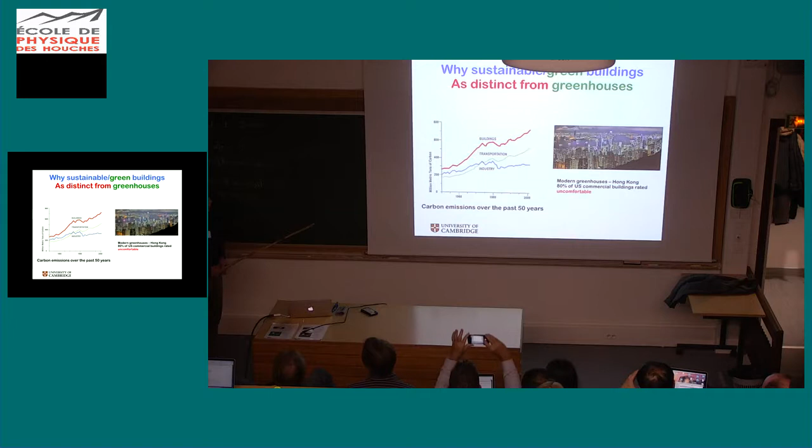If you do a survey of people who work in commercial buildings of this type that are fully air-conditioned, you find that most of them think they're horrible. Everybody knows that in a US building in the winter you have to take your clothes off because they're too hot, and in the summer you have to put clothes on because they're too cold. So we don't even get the sign right.

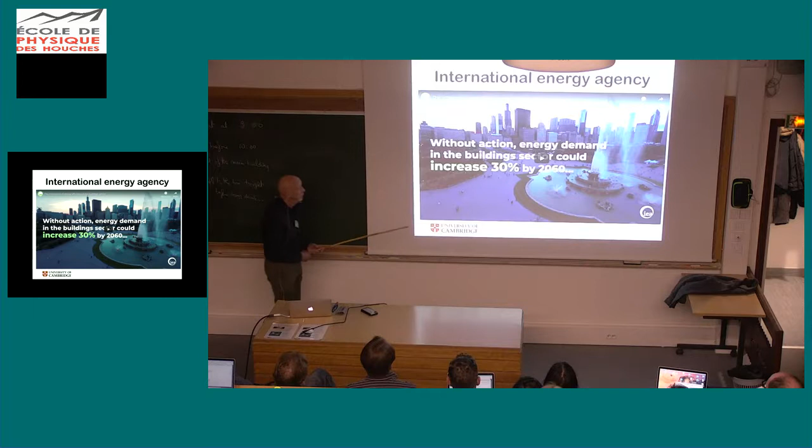There's a real concern that this is actually just going to get worse. Here's a recent report from the International Energy Agency saying that energy demand in buildings could increase by 30% by 2060. In their report on the future of cooling, I've taken a few phrases here from their executive report, which you can read, but I think it's very clear that something needs to be done.

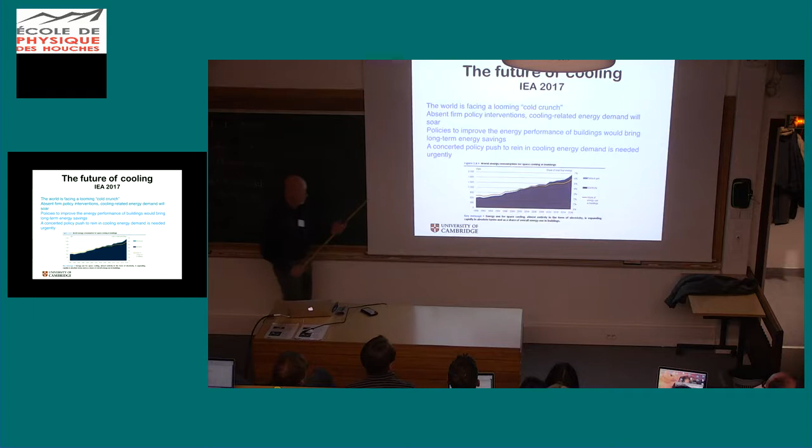If you look at the energy consumption in space cooling for buildings, you can see it rises inexorably and is going to continue to do so. So it's a serious problem, a serious contributor to greenhouse gas emissions and so on. So what can you do about that?

And here are the culprits, the air conditioning units. I lived in San Diego for 12 years, and the weather there is absolutely perfect. My neighbor installed one of these on the side of his house and blew all the hot air out of his house directly into my living room. So it meant I had to close the windows in my living room because of that.

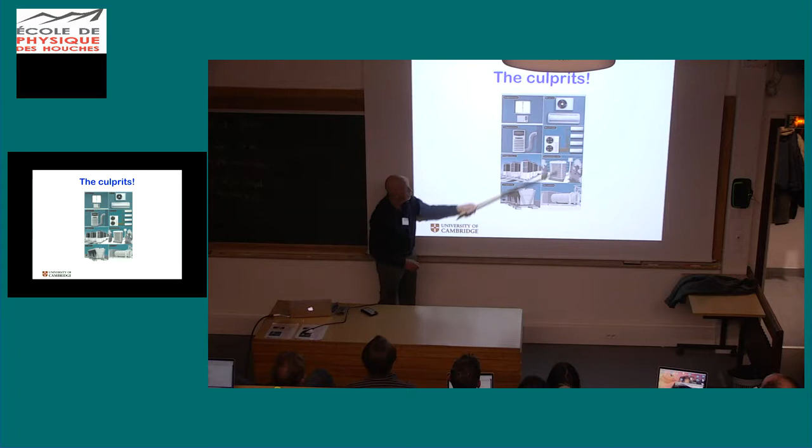And that happens citywide. All over the cities, these kind of things are pumping hot air out that they're extracting from buildings, and they're contributing to the urban heat island and the stresses that we all are aware of. So how do we get rid of these things?

Well, one of the things that we're also concerned about is the quality of the external air. We know that there's a lot of emphasis currently on air pollution. In the UK, we exceed our annual limits for air pollution, typically in the first 3 days in January. So it's a really big problem for us, and we're doing a lot of work to try and deal with that. And we know that this has huge health consequences.

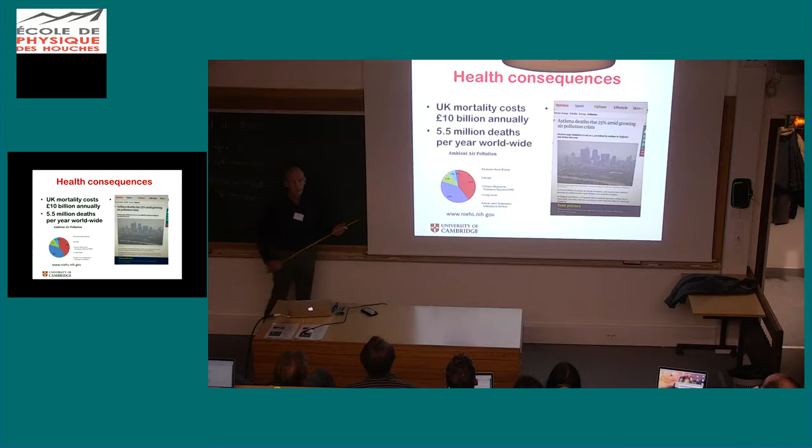It costs the UK, we think, around £10 billion a year, which will be our GDP by the time we leave Europe, and is a very major contributor to health and deaths worldwide.

As a result of this, we actually have a project called a Grand Challenge project, which is called MAGIC, standing for Managing Air for Green Inner Cities.

For this, in order to get this grant, we had to come up with a Man on the Moon mission statement. So our Man on the Moon mission statement is the 0-0 Grand Challenge, which is that we will develop cities with no air pollution and no heat island effect by 2050.

I'm aware that that's unlikely, but the point is it's meant to give a direction for decisions. So if you're making a decision which makes air pollution worse and increases the heat island effect, it's probably the wrong decision to make. I'll tell you more about MAGIC as we go along.

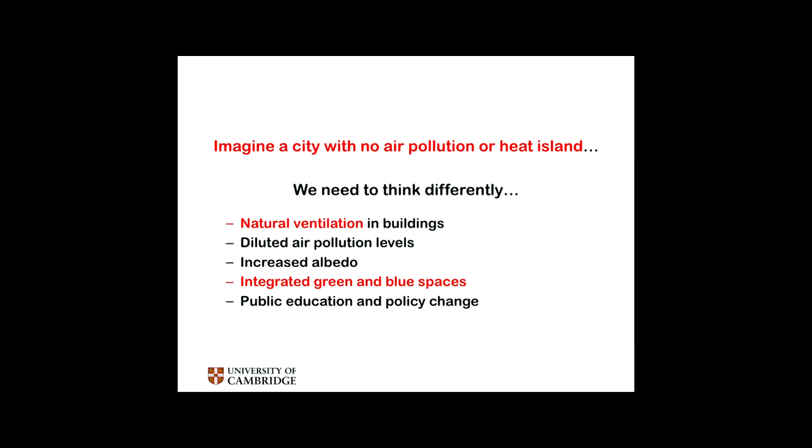But what we're imagining is a city with no air pollution or heat island. We need to think differently about cities. I've shown you these glass boxes, so we're interested in maybe making buildings much more porous, using natural ventilation to cool them rather than air conditioning.

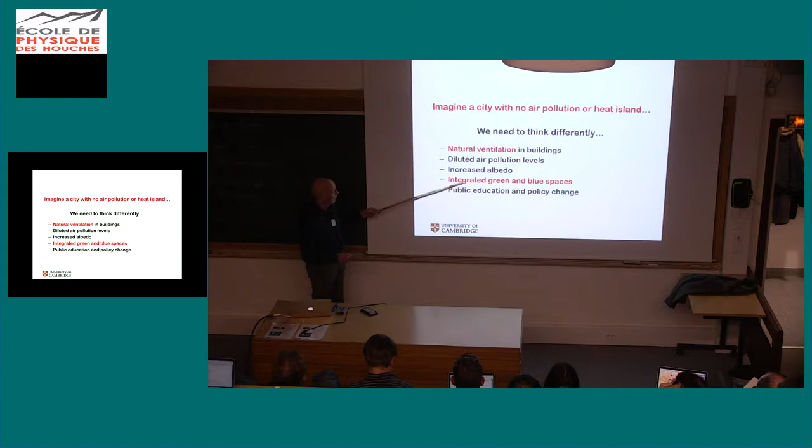And we're also very interested in integrating green and blue spaces. Martin talked about green roofs and so forth. And of course, eventually we want to change the way we behave.

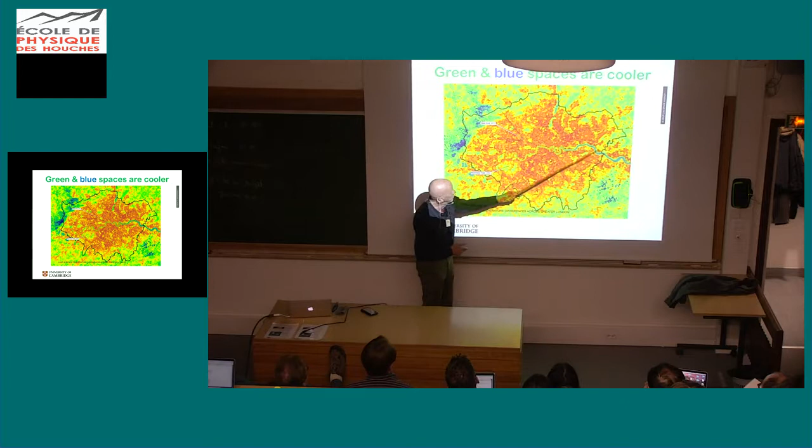In the west end of London, it's 31. And you can see by this blue region that the Thames is relatively cool. So how much can you build on that also to make places more habitable?

So it all started back in the beginning of the 20th century when air conditioning was invented by Carrier and was first introduced into a building in the very early part of the 20th century in Buffalo, upstate New York, the so-called Larkin building, designed by Frank Lloyd Wright.

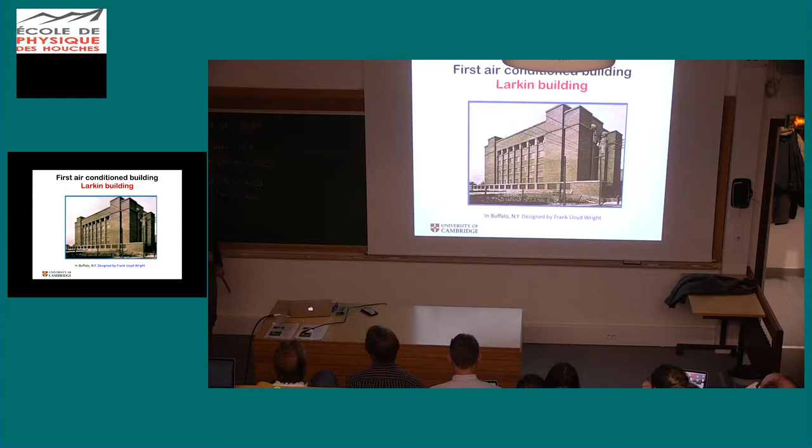What's notable about this building is it looks nothing like any of the nice buildings Frank Lloyd Wright designed. Rightly so, this no longer exists, whereas all his other ones do and are cherished. The other thing to note is that it doesn't look anything like a modern air-conditioned building. It looks like a traditional building, with lots of thermal mass, thick walls, small windows. The result is that air conditioning has changed the way we build buildings completely, but with the energy consequences that I outlined before.

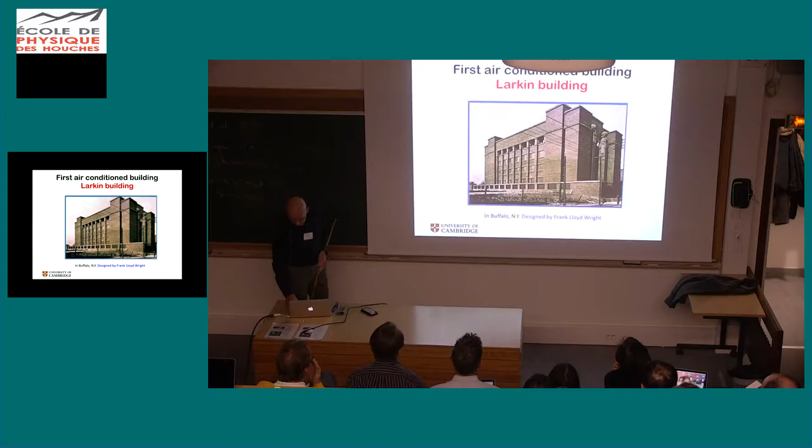And what's the problem? My thing is falling off. Just don't mess my hair up.

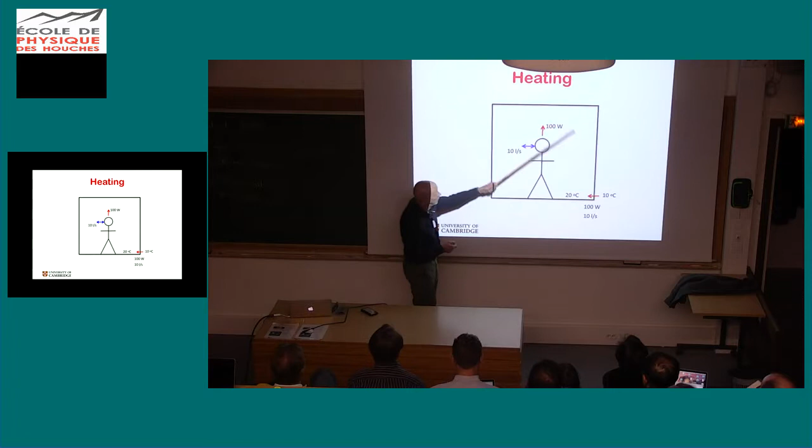Okay, let me try and explain the problem. Suppose you're in a totally insulated room on your own. You give off about 100 watts, like a rather bright light bulb. And you need about 10 liters per second of air to breathe so that the carbon dioxide doesn't build up too much and feel stuffy.

If this is a totally insulated box that's built by no builder I've ever met, but where everything is sealed, then this airflow will raise the temperature just by this 100 watts by 10 degrees C. So if it's 10 degrees outside, it's 20 degrees inside, and you're fine. So the heating problem is not a really big energy problem as long as you insulate well. You just need to, if it gets down to 0, add another light bulb, and you're fine.

Okay, Eckhart, I'm trying to make sense of the 10 liters a second. Yeah, you don't want carbon dioxide levels to build up, so you need to refresh, and you breathe out a lot. You don't breathe it in and out, but that's the flow rate you need basically to keep the whole thing going.

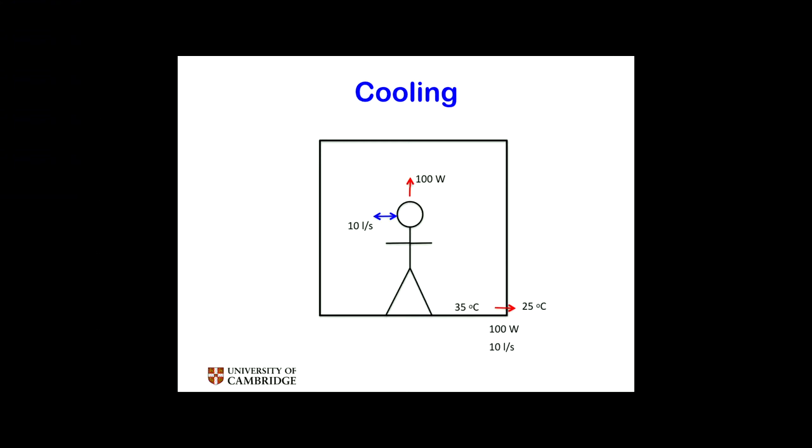On the other hand, if you cool, everything is the same, of course, and now this 10-degree difference means that if it's 25 outside, it's 35 inside. So that's the fluid mechanical problem. If you want to make this 25 or 26 degrees, you've got to increase this flow rate by a factor of 10. That's a ventilation problem.

That's a fluid mechanical problem, so I'm interested in that problem. The question is: how can you generate big airflows in situations where you're just using natural forces, natural ventilation? You're not providing any cooling, and you're not using any mechanical ventilation. So that's the challenge, essentially.

So this is the fluid mechanics problem, and I think it's nice to compare and contrast two things.

If you think about flows around aerofoils, the only thing that really matters is the geometry of the aerofoil and the angle of attack. You don't care much about the properties of the fluid, whether its density changes or anything like that. The whole flow is governed by the boundary conditions. If you go to something like a hurricane, it's all determined by internal dynamics, the release of latent heat and convection, and you don't care about the boundary conditions or the shape of the domain that much. In buildings, both of these things matter hugely.

So buildings, I think, are more difficult than rocket science, and in fact meteorology and oceanography, just to be provocative. So let me show you how boundary conditions matter.

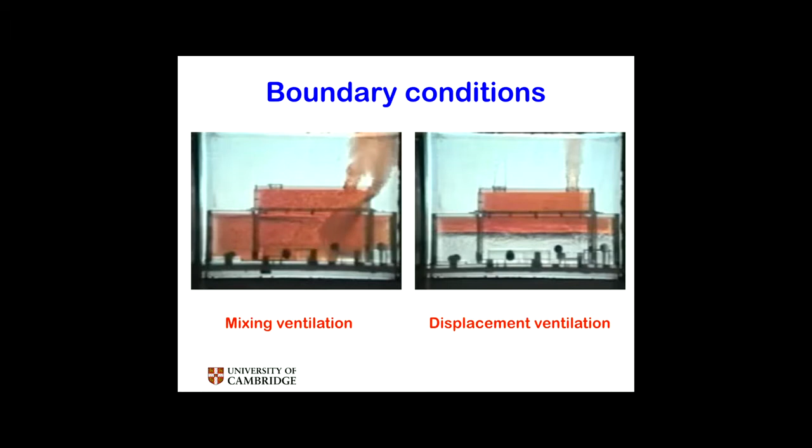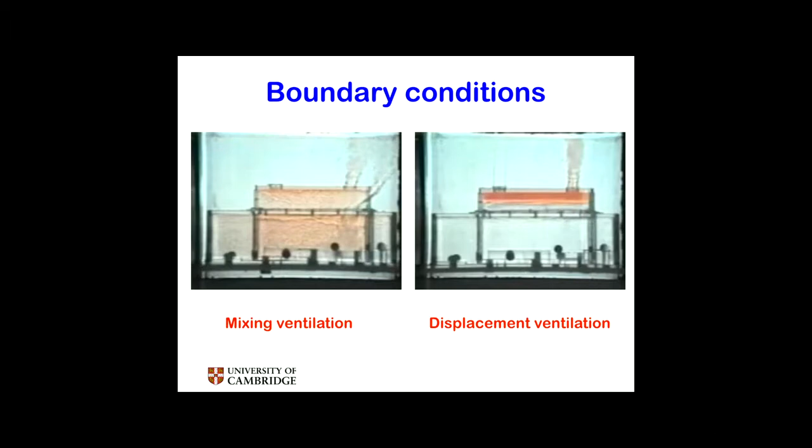Here is a hot building, and all I've done is open an opening here and an opening there, and this one. On this building, I've closed this opening and opened the same size opening down here. The flow is completely different, as you can see. In this case, the cold air falling down keeps it relatively well mixed—this is called mixing ventilation. In this case, the cold air coming in stays underneath this warm layer and just pushes it out—this is displacement ventilation. So all you've got to do is change the position of the opening, and everything is completely different, depending on how doors and windows are arranged. And that's hard to deal with.

Then the internal dynamics are interesting. As I said, you all give off 100 watts, so above each of you is a plume rising—turbulent flow. We know lots about plumes, we've heard a lot about them this week. We know they entrain—here's an example of two plumes rising and merging because they entrain air from between them. We know their volume flux increases with height and the temperature decreases with height. We know a lot about these things, mainly due to my PhD supervisor, Stewart Turner.

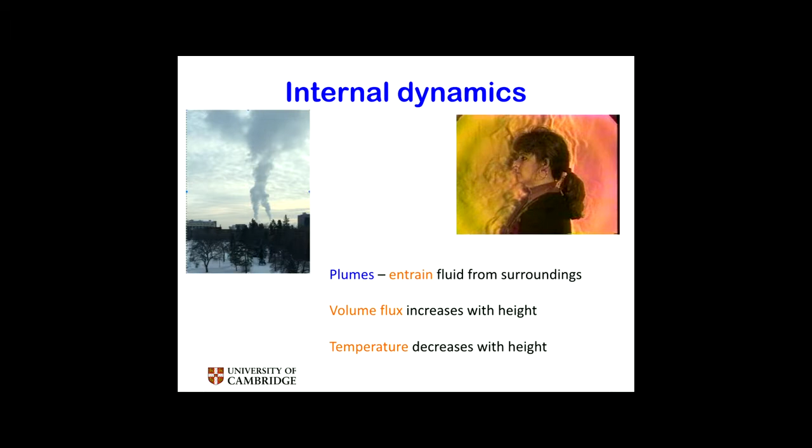But we have to deal with this as well inside a building. So we're going to use natural ventilation because it's free. There are two sorts: the wind, obviously, and then the heat—solar gains, sun shining on the building, or internal gains, people, computers, machinery, whatever. And how are we going to use these in order to ventilate our buildings?

There's also, as Catherine said, increasing evidence that natural ventilation improves productivity. It's kind of hard to know for sure, actually, but there's been some recent measurements that suggest it actually increases brain activity when you're subject to an environment that changes in time compared to something static. I think this is an interesting development and may provide some basis for this idea of increasing productivity.

And in terms of a building owner, if you can get 5% more effort out of your workforce, it outweighs every other economical consideration, pretty much.

And we can build these buildings that work well. This is a building built by Alan Short and others—he's now the Professor of Architecture in Cambridge, won the Green Building of the Year in 1995. I worked on the airflow model of this building. For 20 years, we've known how to build buildings that are very efficient, very effective, and produce wonderful internal conditions. You can see this looks a lot more like the Larkin building than many other modern buildings, and has some interesting features like these tall stacks here. I'll try and explain how that all works.

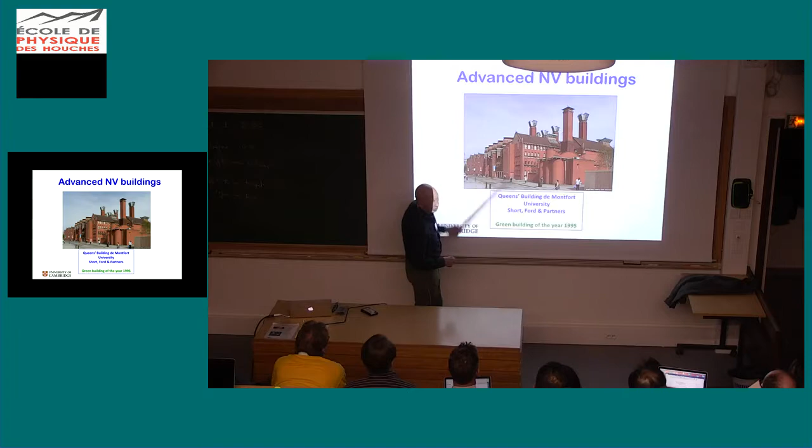So as I said, we have natural ventilation—wind-driven ventilation and temperature-driven ventilation, which in the jargon we call stack-driven. I showed you an example of displacement and mixing ventilation, and we'll talk later about cross-ventilation, the single-sided wind-driven ventilation. Then at the end, we'll combine them together and see how they interact.

Okay, so this is stack-driven displacement ventilation. Imagine we have a single heat source in a space. The hot air leaves at the top and there's cold air coming in below, and you set up this stable density interface. What happens is the fluid that comes in through the bottom is entrained into the plume, carried across to the upper layer, and leaves.

It's a very simple case, a spherical cow example, but we can analyze it.

So what happens is the air comes in with some flow rate Q, crosses the interface in the plume, and leaves with the same flow rate because the volume is fixed in a steady state. If you take the heat balance for the upper layer, the heat coming in, which is the heat flux in the plume, means the excess temperature must be the same throughout, because heat must leave at the same rate in steady state. So this has just a single temperature, a very easy thing.

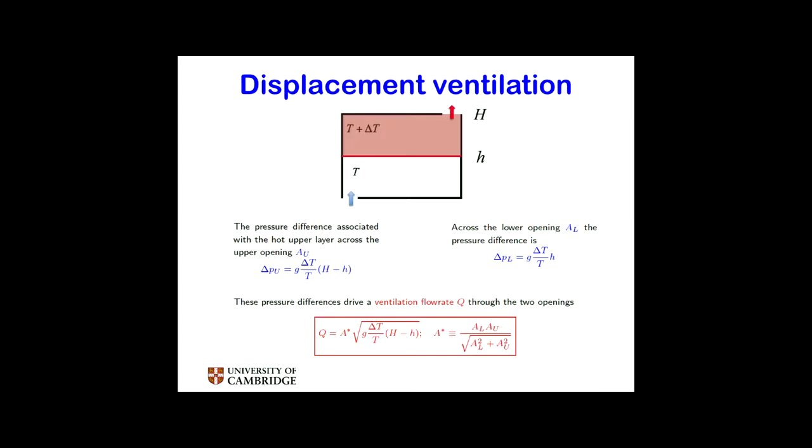You can calculate the flow through this. Imagine this upper layer: there's a pressure difference across here and a pressure difference across there, which are given. I'm not going to do the analysis, but you can calculate the flow rate as a function of this combination of upper and lower areas, and effectively the buoyancy of this upper layer. I want to discuss this equation a bit.

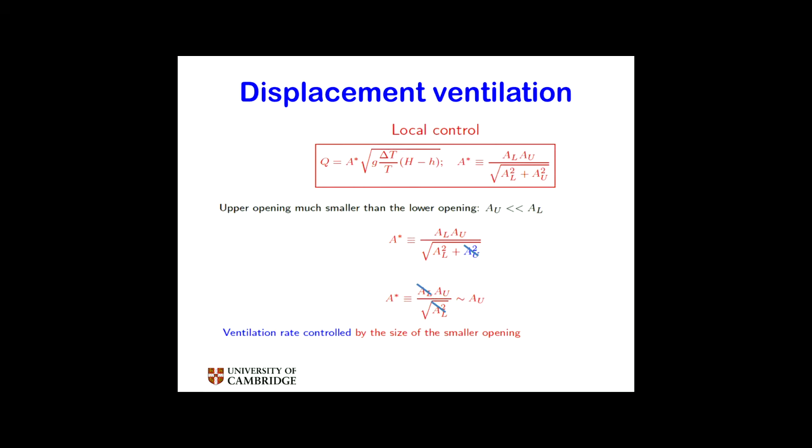Suppose the upper opening is very small compared to the lower opening. Here is our combination of openings that controls the flow rate. If this is very small, we can neglect it, and then these cancel, so the flow rate is effectively controlled by the small opening. The whole system is controlled by the small opening.

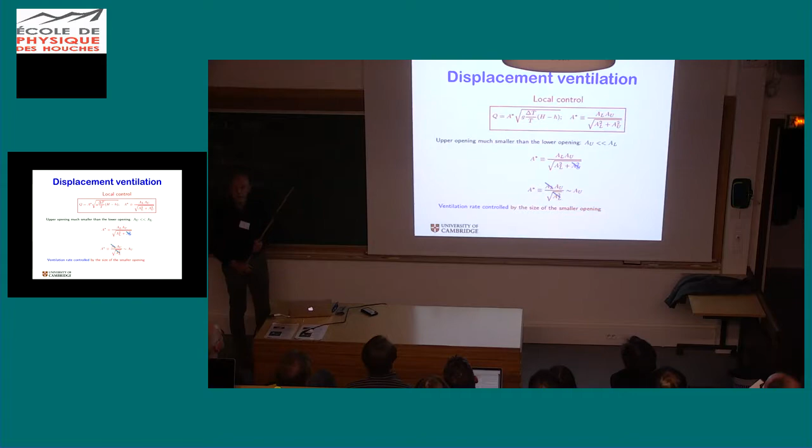So if you work at the Center for Mathematical Sciences, you work in a naturally ventilated space like this, where up here we have a small opening at the top and lots of openings down here for inflow into the offices, and so the whole flow through the building is controlled by this effectively.

So if I get a bit hot in my office, I'll open my office window and get a bit more fresh air, and Colin will get a bit less fresh air, but the whole flow through the building will be the same. So it's a very robust design, and that's why it looks like this.

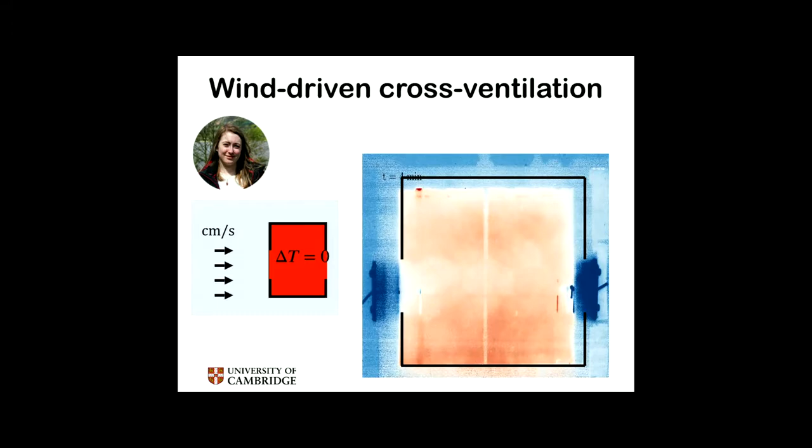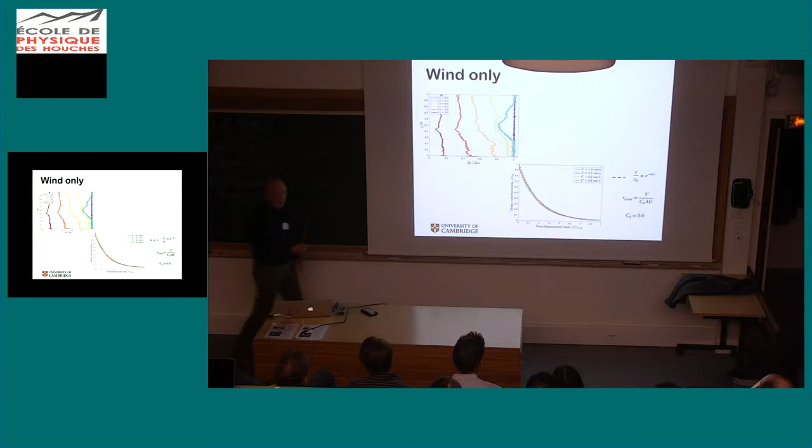So this is obviously well represented by a well-mixed model. Here is the dye concentration initially, here is the bit when it comes through the window to start with, but you can see later on effectively everything's pretty well mixed, and the concentration on average decreases exponentially, and you can calculate how that works very straightforwardly. So that's a very straightforward situation.

So that's cross ventilation with no buoyancy. Now the thing is that that's very rare. It's very rare to have a situation where you have a window on one side and a window on the other side, and certainly with no buoyancy.

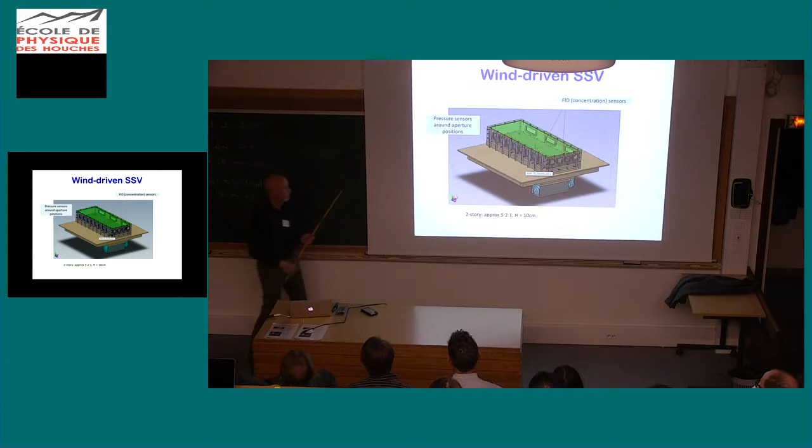What's normally the case is that when you open up windows, you only have them on one side of the facade. As I said earlier, we know how to make new buildings work well. The real challenge is how to fix old buildings that don't work well, and the likeliest thing you'll do is just open some of the facade up, and it's likely that they'll only have access to part of the space.

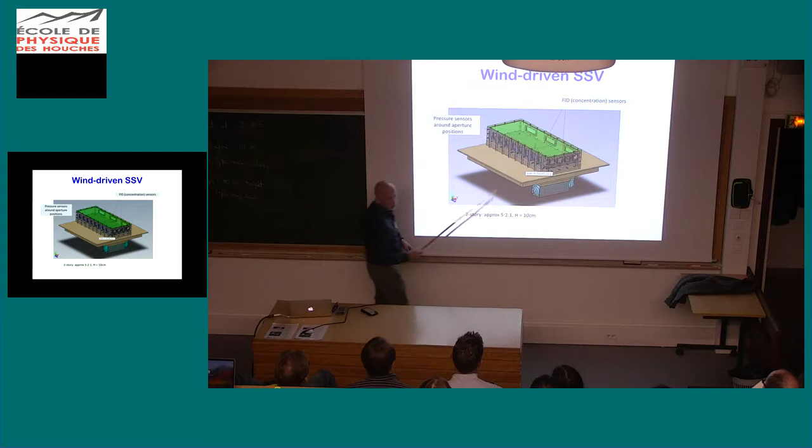So there's a lot of interest in what happens if we have just single-sided ventilation, so just say a window or two windows open here and everything else closed, and how does that work? I'm going to show you the two window case just to show you the kind of things that matter.

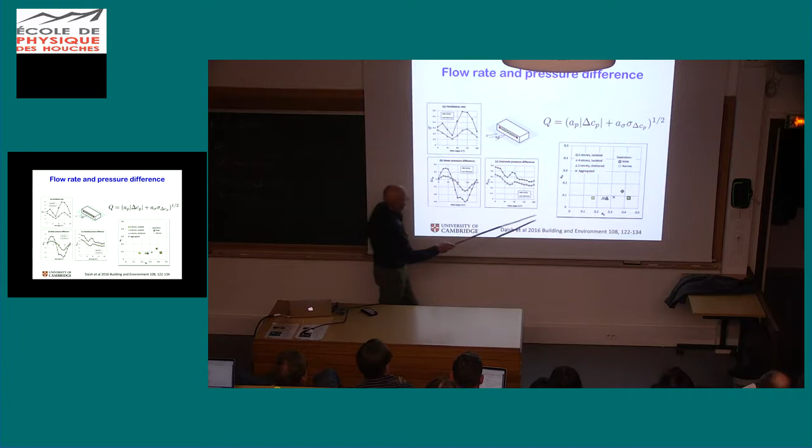What we did was arrange this building either as a two-story isolated building or a four-story isolated building, and then we looked at what happens if we put buildings around it, because the question is, how does that shelter it? And what you can do, as you can see here, is characterize this quite nicely.

So you can find values for the coefficient of the mean pressure difference and also the fluctuations. The contribution of the fluctuations is always about the same, but the mean pressure difference varies a lot depending on whether the building is sheltered or not. And that's about as good as you can do with this kind of thing.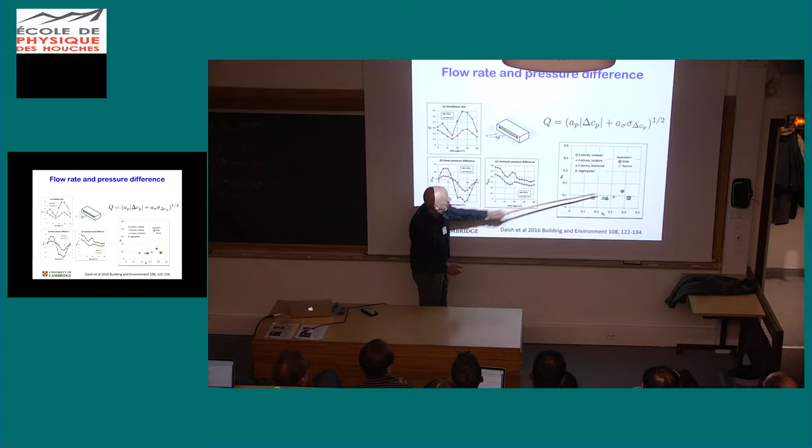But the flows are really quite interesting, and we look at the one at the... So now we're looking at the case where this is completely in the lee, and the wind is coming from the front.

And you can see here that actually the ventilation flow is really just purely driven by the unsteady component of the pressure field. You get pumping, so outflow here for a while, and then inflow, and then outflow, and so on. And that's associated, obviously, with the vortex shedding around the building. I think modeling that is a really major challenge, actually.

Okay, so that was single-sided wind-driven flow. What about single-sided stack-driven flow with temperature variations?

There's been some studies looking at the impacts of different sorts of windows. What's typically done is you heat up a space like this, you put one kind of window in here, you measure the decay rate of a tracer, in this case carbon dioxide, because it's a very passive tracer. And then you measure the mass flow rate as a function of the openable area. You get, obviously, an increase in ventilation the more you open the window, no surprise.

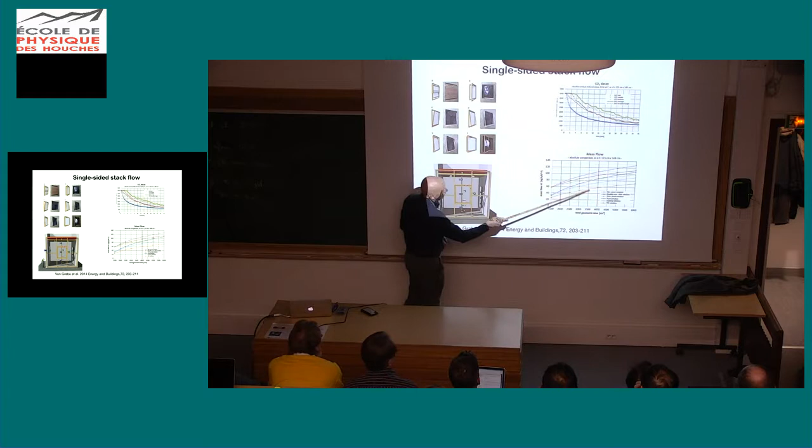But different shapes give you different levels, and in fact the variation can be significant depending on the different kind of window geometry. And because we use these a lot in the UK, I thought we'd just look at this one a little more.

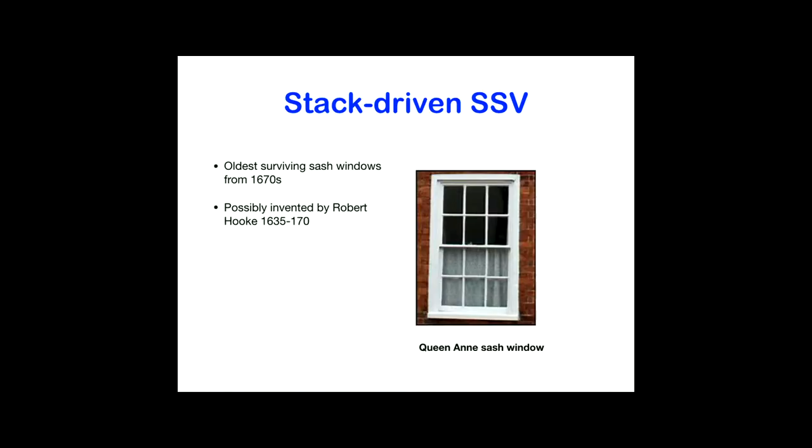These windows go back to the period of Queen Anne. For those of you who've seen The Favourite, it's hard to imagine that people were designing windows in those days. But anyway, there's some suggestion that they were actually, obviously done something wrong here, 1670, possibly invented by Robert Hooke.

So you can build a model of this window. I'm just going to show you what happens if you imagine that everything stays well mixed in here. It's at some temperature which is bigger than the external temperature, that's warm inside, and so forth. Typical temperatures are such that the flow is buoyancy driven, so if it's cold inside, it just goes the other way.

What you say is the flow inside here is slow, except near the openings, and so the pressure is hydrostatic. So you can simply draw the change in pressure, just the weight of the fluid. And the weight of the fluid inside is less than outside because it's warmer, so the pressure gradient is less. So there's some point where the pressures are equal, the so-called neutral level.

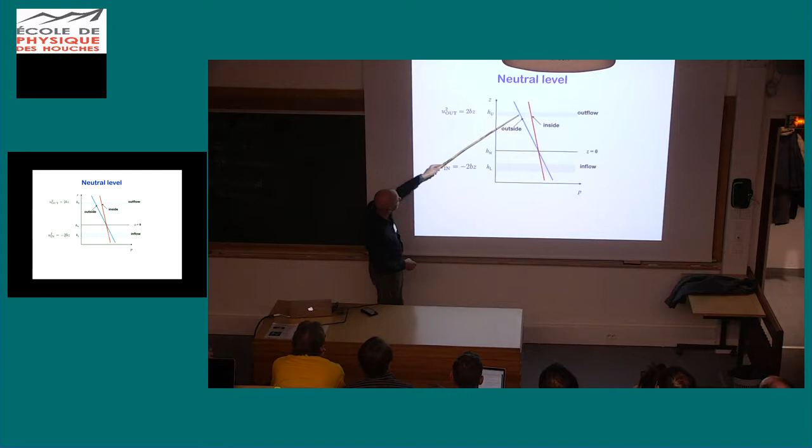So outside, at the bottom, the pressure is higher, and so there's inflow. And inside, the pressure is higher, so there's outflow. At the top, sorry, the inside pressure is higher, so there's outflow. And if you imagine that it's some sort of Bernoulli type thing, you can calculate the flow. I'm not going to do that.

If you imagine that you have a normal sash window and you keep the top closed, so this is the glass bit, the blue bit, and just open the bottom bit, then obviously you must have equal and opposite inflow and outflow, and that means that this neutral level sits in the middle, and you can calculate what's happening.

And then you can ask the question, if I open the top panel, what's the minimum I have to open it so that there's only inflow here and no outflow? And that condition is that this distance just equals the opening size. And if you open the window totally to the maximum extent, so this is half the actual total height here, then the answer is about a sixth.

So you just need a small opening at the top. It's about a third of the size of this bottom opening. And then the flow in here is all inwards. And why does that matter? Well, it matters for two reasons. I think one is that these flows can be quite complicated anyway, and perhaps I won't do that bit.

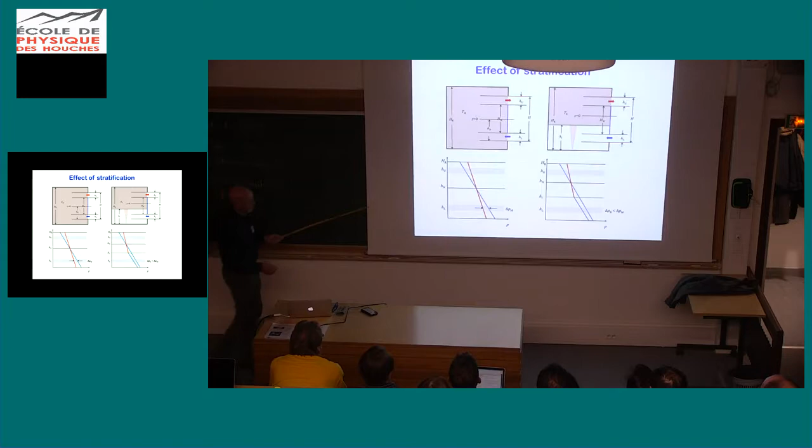The kind of model I described works well as long as there's only inflow here, same as the displacement plume flow shown before. Imagine a heat source here, then you have a heat flux in and the same heat flux out. These must balance, and since the flow rate in equals the flow rate out, you can solve this problem.

On the other hand, if you make this too small so the interface sits below the level of the opening, there'll be outflow here too, and we no longer know how to partition the outgoing flux. What we expect then, because of the so-called filling box effect, is much more complicated stratification, making it a much more difficult problem.

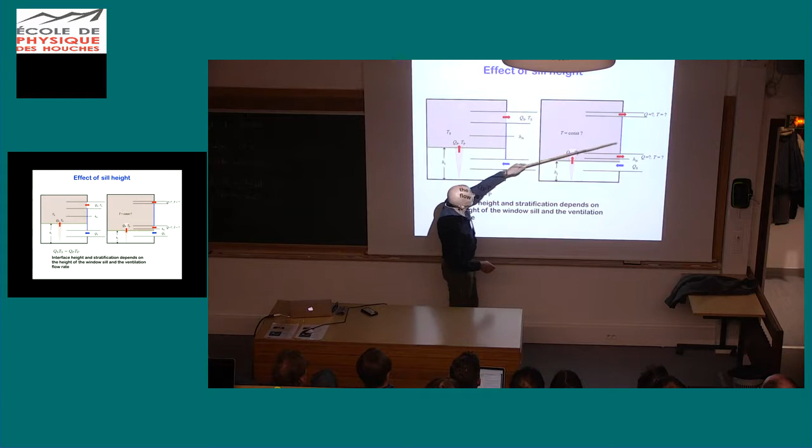So the performance of these windows depends not only on how much you open them, but also on the height of the sill. If it's low down near the floor, with this region above determined by the flow rate, you get one behavior. If instead the sill is up higher, it behaves differently. So even something this simple can be relatively complicated.

Now I want to combine wind and temperature together and show some more of Megan's experiments. This is a warm room, heated up to some value, and we define a Froude number as the flow speed divided by the characteristic buoyancy speed, based on the height of the window and the buoyancy from the temperature difference. Beta here would be 1 over the absolute temperature.

Yes? That's a good question. So in the case when delta T was zero, we saw it was well mixed. No, don't steal my thunder.

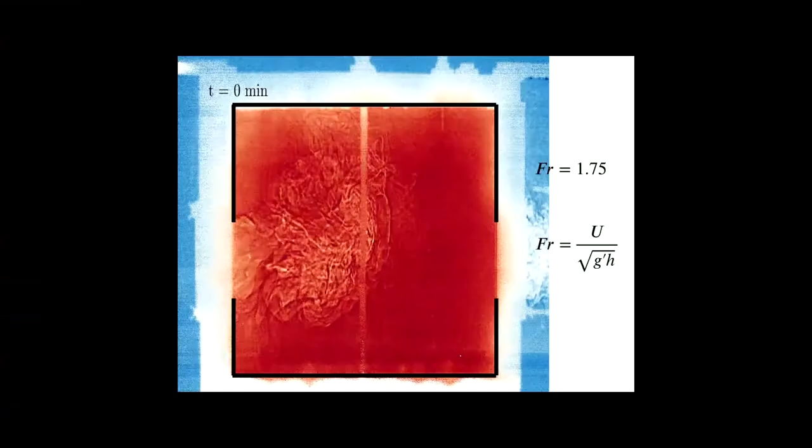So now we have a strong wind, with the Froude number close to 2, meaning the wind speed is about twice the buoyancy speed, or 1.75. The flow is completely different from the case with no density difference. I hope you can all find your favorite instability here. Over time it changes — there's a lot of turbulence and mixing, initially associated with convective overturning of this region, and later you see a scouring flow across here, impacting this wall with some overturning. So we get lots of applications of stratified mixing here, even though the buoyancy effects are relatively small, with the wind still dominant in this case.

But it changes the flow pattern completely — even small amounts of stratification change the behavior. Eventually this erodes the upper region, much like classical mixing experiments across interfaces.

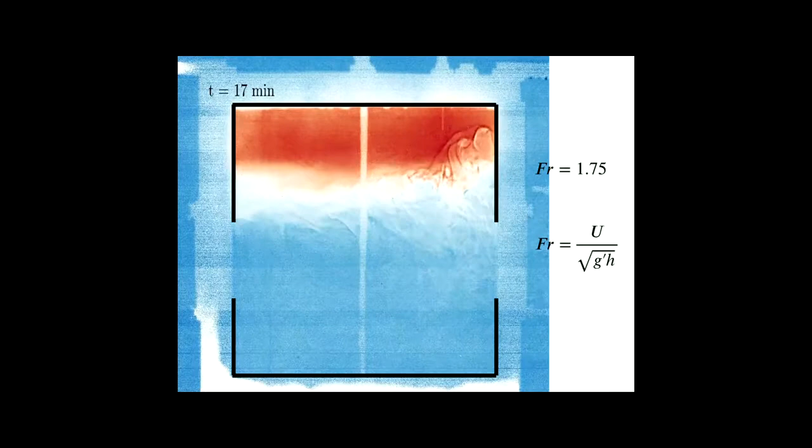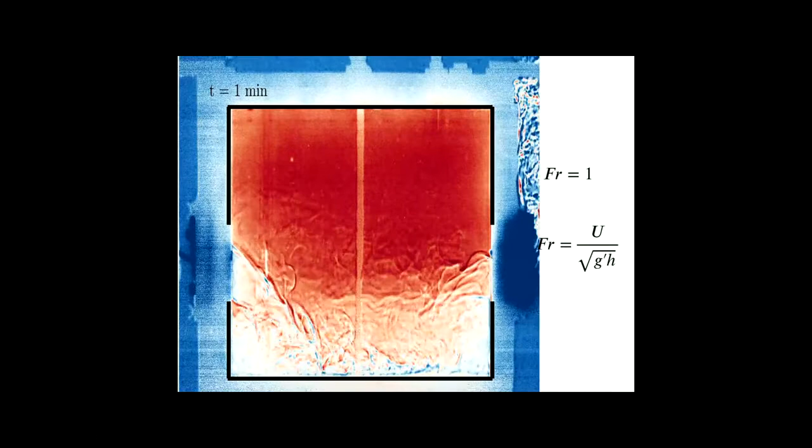On the other hand, if you make the buoyancy and wind speed essentially the same, you still get inflow on the windward side and outflow on the leeward side, but there's a little evidence of some outflow happening just on the windward side when they're matched — though it still looks rather like the strong wind case. Again we have a process of convective mixing of cold air coming in initially, followed by erosion.

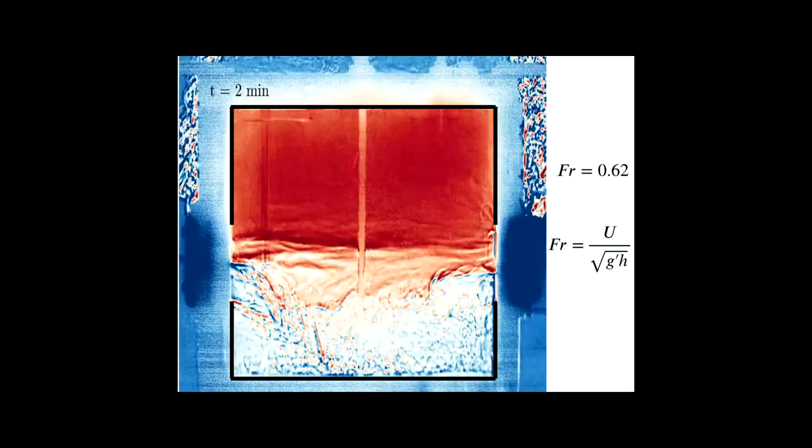Finally, if we make the buoyancy very strong, we get outflow through both the windward and leeward windows, with very vigorous mixing — convective mixing, internal waves, all sorts of things happening. So just adding buoyancy in this simple way changes the flow completely.

And the consequences of this are quite interesting. First, you can make a reasonable estimate of what happens, at least for the initial phase, if you imagine that the whole region below the window is well mixed — which, as we saw, is only an approximation to the truth, but gives a reasonable estimate for the decay of the temperature.

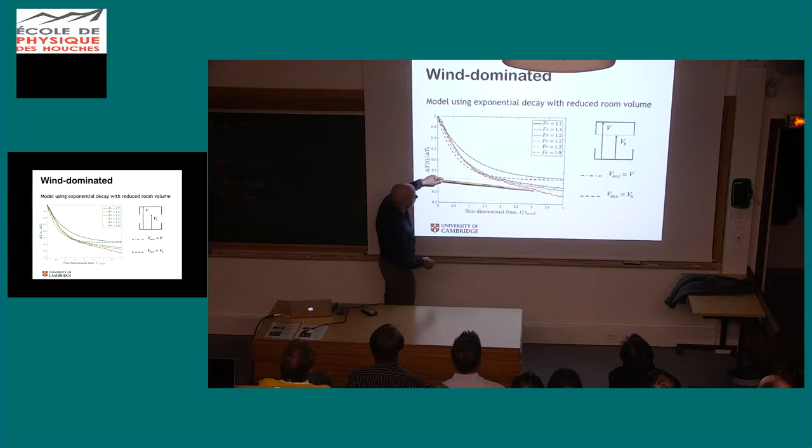But in the later stages, once you're scouring this interface, we see a completely different behavior, and this is really an erosion process. If you want to know more about that, please ask Megan.

Another curious thing about this: imagine the wind is really strong, and you add some buoyancy to the system. Essentially, when the wind is very strong, it flows through the window in this direction. When there's some buoyancy, it retards the flow at the top part of the window and enhances the flow at the bottom part. That change in area is reflected by a change in the flow rate compared to the wind-driven case only, given by this formula.

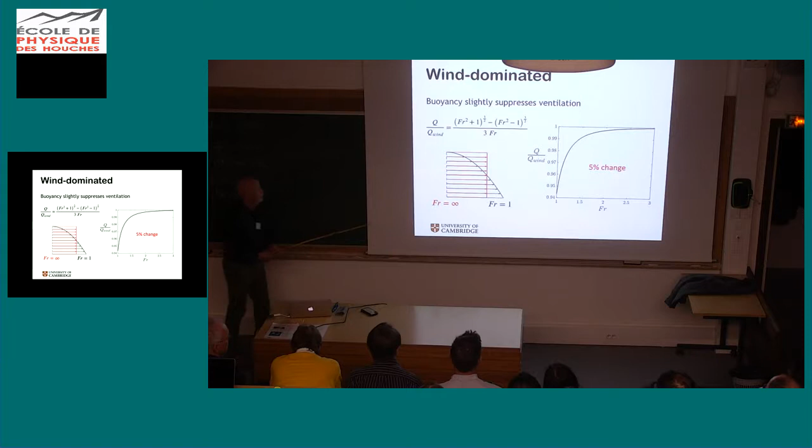The interesting thing is this is where wind and buoyancy are equal, and here when the wind is 3 times as strong, the change in flow rate is only 5%. So the impact of buoyancy is actually negative—when you put buoyancy in, the flow is reduced, but the effect is relatively small. So in the case when the wind dominates, you can probably just imagine that buoyancy is really irrelevant here, because the error would be 5%.

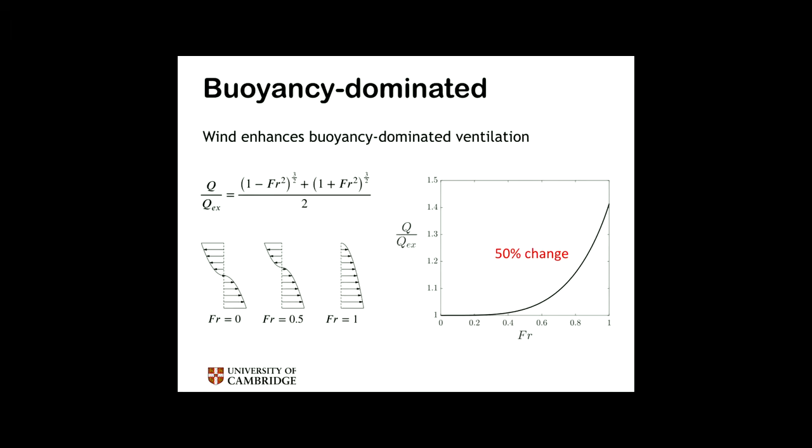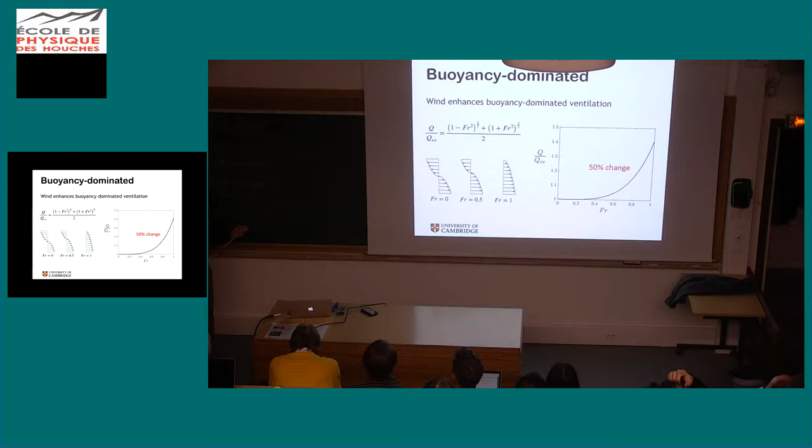On the other hand, if buoyancy dominates, initially at Froude number 0 you've got an exchange flow through both openings, and as you increase the effect of the wind, you force all inflow here. Through the same argument, you make a big difference to the flow through this window—it's almost 0 here, and it's a lot here. So this flow rate now changes by 50%. If you've got a buoyancy-driven flow and add a small amount of wind, you change that hugely. It's qualitatively different depending on which of the two forces is dominating.

So what I want to do for the rest of this talk is build on what I've just been talking about—the physics of these buildings—and say a little bit about the magic project we're working on. Quite a lot of this resonates with what Martin and Catherine said today, so I'm not going to spend too much time on it.

But I wanted to show you those simplified models of buildings, because people want to make a decision about whether it's a good idea to use natural ventilation. Can we make a rough and ready calculation? How should we design various openings? These kinds of models are very useful for that, and they're moderately accurate.

If you want to do more than that and couple them accurately with the external flow, then, for example, from the wind-driven case as I showed you, you need to know the pressure on the building facade—and in fact the difference in pressure from one place to another—both highly resolved in space and time.

So this is hard. You need to know, for the buoyancy case, what the external conditions are: temperature, solar radiation, complicated as you heard before by radiation from buildings and by shading. I haven't mentioned much about this, but if you're bringing air from outside in, you want to know what the external pollutants are that you're bringing in.

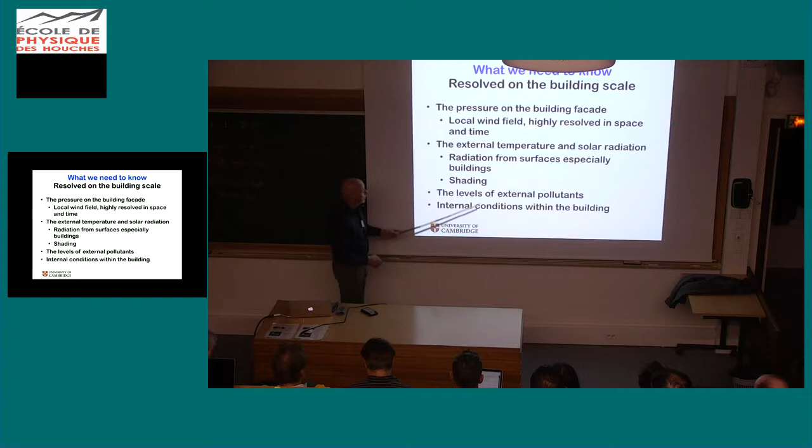And of course you need to know what the internal conditions are: the temperature inside, the internal pollutants, and so on. So these are the kinds of things you need if you're really going to couple the buildings with the external flow.

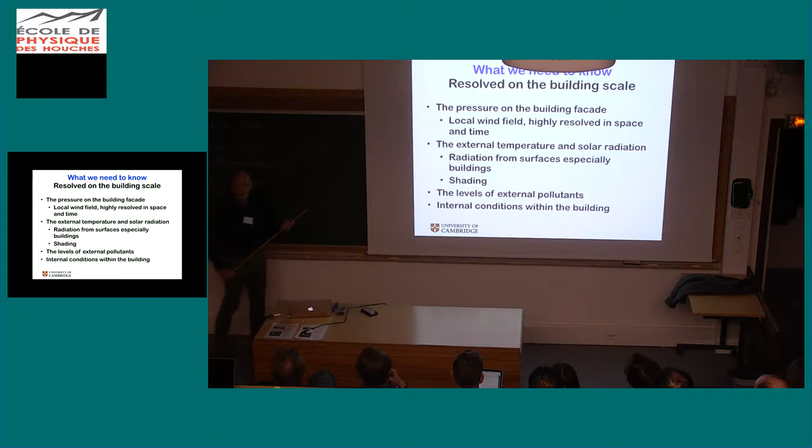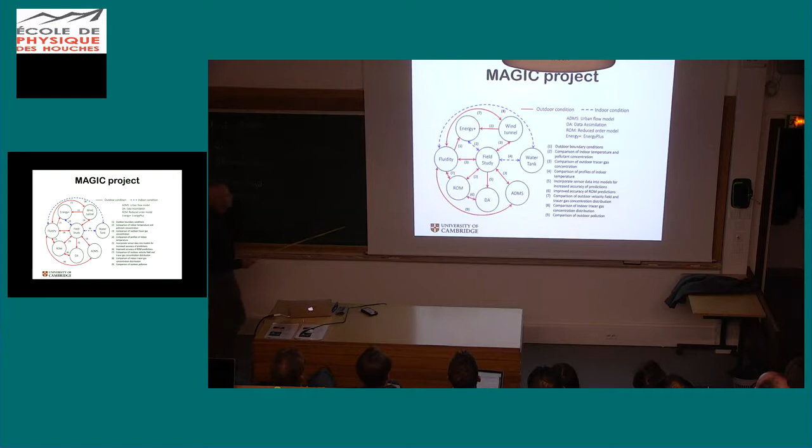As a result of that, we're in the middle of this MAGIC project. It's a 5-year project, and we're about halfway through. It has a whole bunch of components which I won't go into in too much detail, but essentially we focused around a field study, and I'm going to describe the results of that. Feeding into this is an LES code called Fluidity, water models that Megan and I just showed you, some wind tunnel work, energy analysis, and some other aspects of reduced order models and data assimilation—plus a Gaussian plume model for comparison.

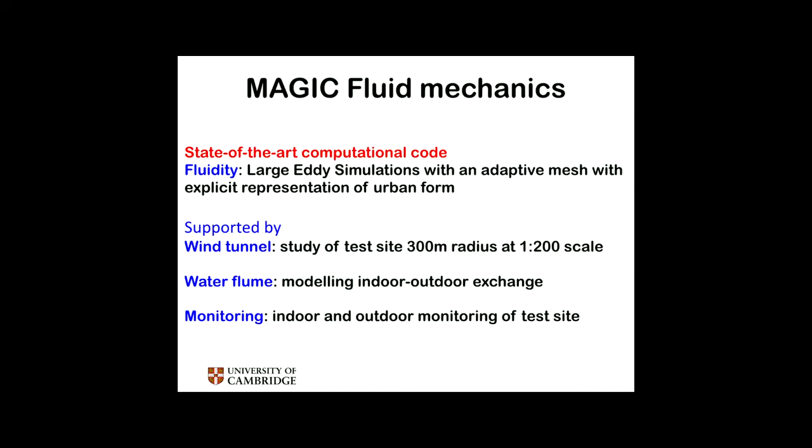But we're all focusing around this field study. I'm going to tell you just a little bit about that - no, actually I'm going to tell you this first.

So fluidity is a large eddy simulation model for fluid mechanics. It has a fully adaptive mesh, and we put in an explicit representation of urban form. There was some discussion this morning about whether you can find generic answers for cities, but I think they're just too complicated. I think you need to do the geometry specifically, and I'll show you one example of that.

We have a wind tunnel study of our test site. We do water flume modeling of the indoor-outdoor exchange, I've shown you those, and monitoring of indoor and outdoor conditions. I hope I'll answer your question about what happens inside a real building.

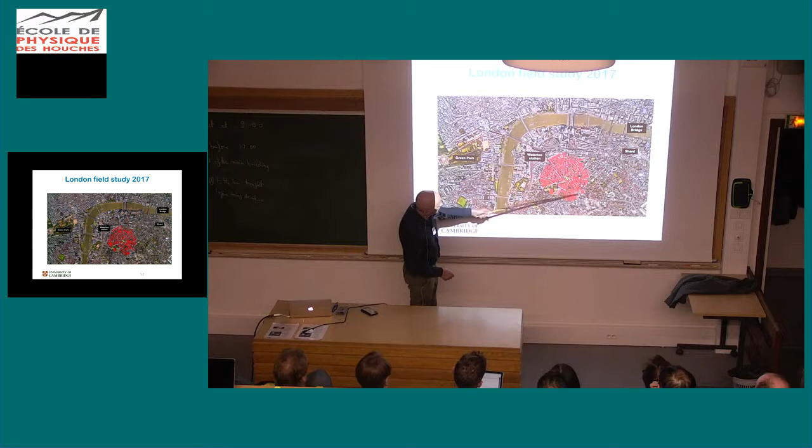So this is what we did in the summer of 2017. Our test site is in London, near the Thames, we're south of the Thames. The red area is our test site, about 300 meters in radius, and this yellow bit here is actually the test building.

We have a test room located here. It's an unusual geometry because the roads are radial, so it's not like an American city. There's a sort of roundabout area here, and this road is called London Road - it's full of traffic. At the back of this yellow building is a clean courtyard.

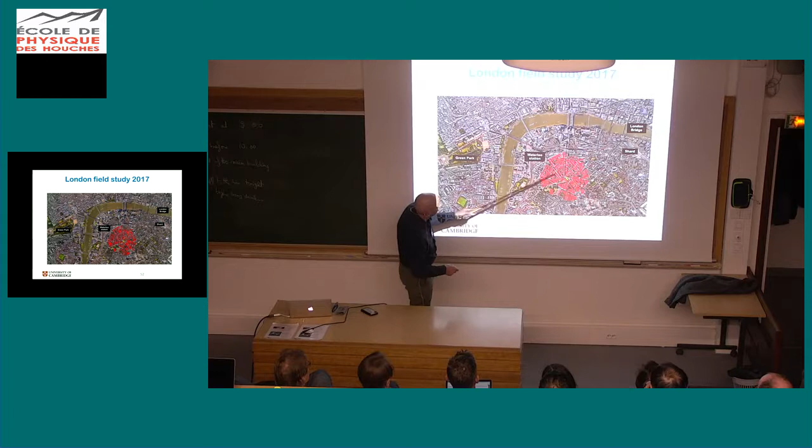We're very interested in understanding what happens locally and also in terms of the region around it. So this is a blow-up of the test site. Here is the roundabout, here is London Road, and our test building is here - we have an office up here where we're measuring.

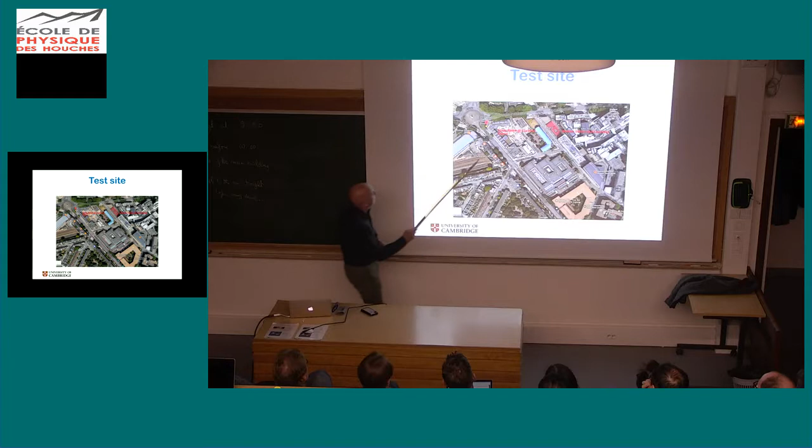This is part of the London South Bank University, and like many UK universities which charge exorbitant fees to students, they have lots of money and are building buildings around this site faster than you can imagine. So it's changing every 6 months or so, but we still have this courtyard here.

We have a test room which has 2 windows on the London Road side - it's a single office, I'll show you a plan view - and a single window at the back, so it does allow cross ventilation. We can open both windows, or if we keep one or other facade closed, we can have single-sided ventilation.

Another view of London Road, a bit like a street canyon but irregular with holes in it, and you can see it has some vegetation, some trees. Our building is sort of just tucked in here, with lots of traffic.

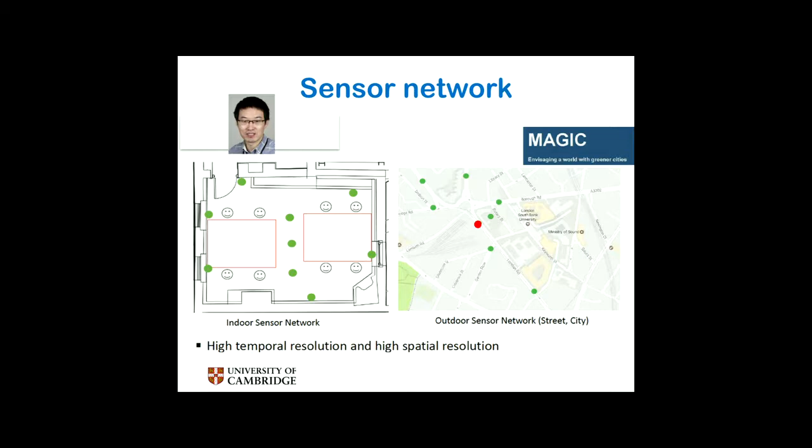What we did was deploy sensors both externally and internally. So this is our test site here, and we have sensors in London Road and at these green locations, within this space which was occupied by a startup - they had 6 to 7 people crammed into this tiny office, with 2 windows on the London Road side and 1 window on the courtyard side, and in fact a skylight as well, which I haven't mentioned.

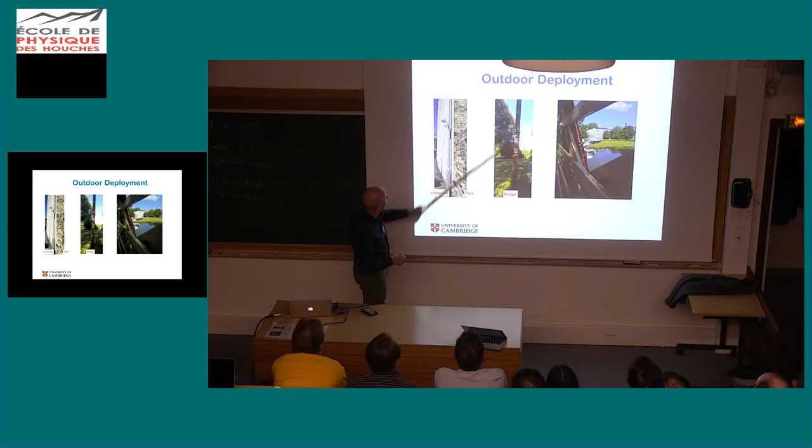Shiwei here built sensors which essentially measure NO2, CO2, CO, temperature, and relative humidity, and I'll show you some of the results from those measurements. In fact this last summer we also deployed another test study in Cambridge to look at the effects of green spaces, but we haven't analysed the results yet. That just shows you a close-up of how we monitor, putting things on lampposts like this to measure the external positions and so forth.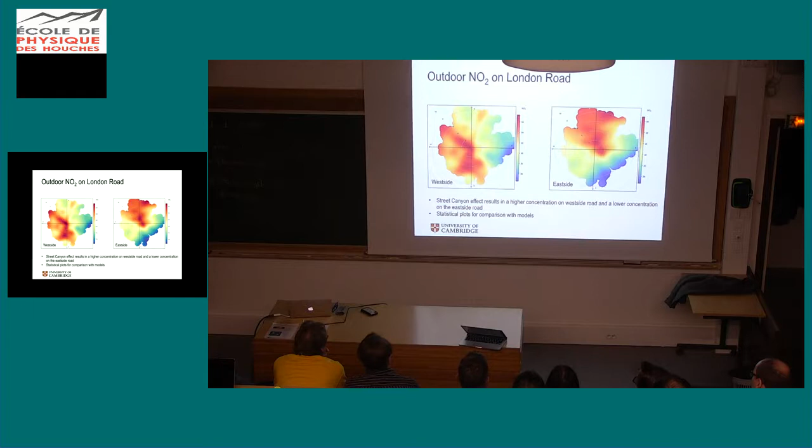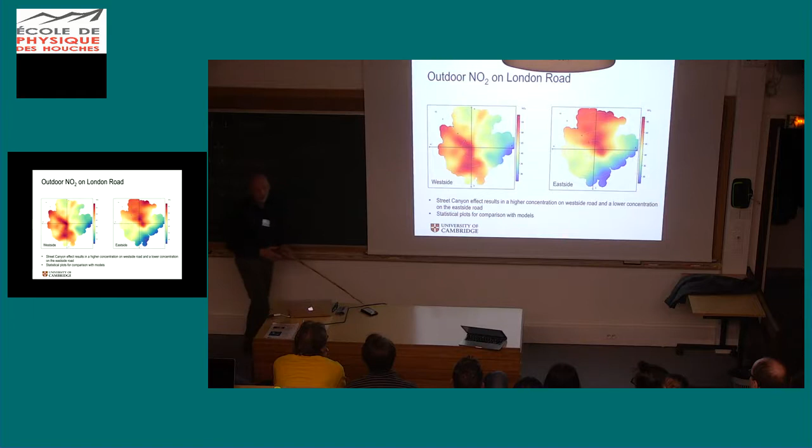You can see immediately that there's a huge difference when the prevailing wind is from the southwest. We get high concentrations of NO2 on one side of the road and tiny concentrations on the other side. This is a nice example of the street canyon effect we heard about today. It tells you that you should always walk on this side of the road and not the other, and that's the kind of information you need as you're trying to reduce your own personal exposure.

So to give you an idea of the kind of indoor-outdoor exchange behavior: outside, the black line is the carbon monoxide measured on the roadside, about 3 meters above the ground, and the red line is what's measured inside the test room over a series of days. You see a very clear cyclical behavior associated with rush hour, and the level outside is always bigger than the level inside.

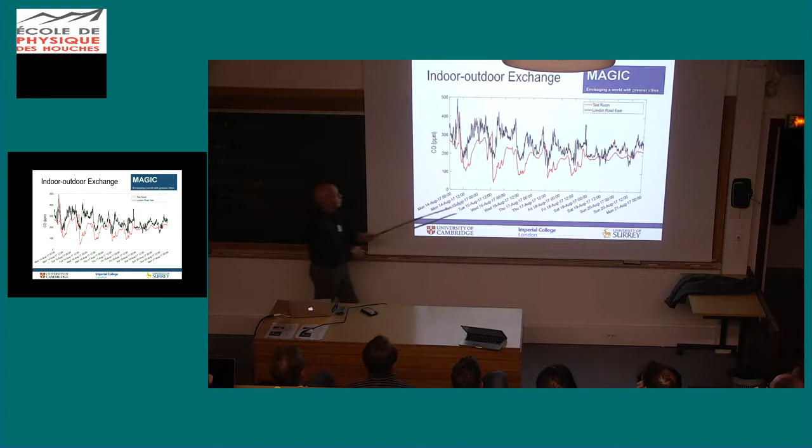That's slightly surprising because CO is essentially a passive tracer, and there is exchange between inside and outside. But it just goes to show that what happens at our windows is actually significantly different quantitatively, although qualitatively the same as what happens at 3 meters. So there are vertical variations in concentration of pollutants as well as horizontal variations.

You can also look at what happens inside—this may answer the questions about variability. So here is a day: people come to work in the morning and they breathe out CO2. The CO2 level rises. About 12 or 12:30, a few of them go out for lunch and the CO2 levels drop.

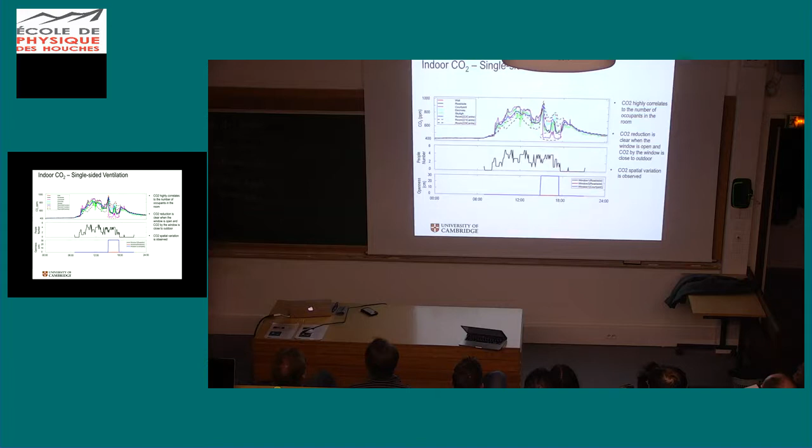Then it gets up to about 1,000 ppm and they think it's really stuffy, so they open the window and the CO2 level drops, but not uniformly. Then they close the window again and the CO2 level rises, and they all go home and it decays away. Nothing too surprising, except this variability is enormous—huge ranges from place to place inside the room. So not at all a homogeneous interior space. Well mixed it's not, right?

In fact, it's vertically stratified both with temperature and carbon dioxide. I'll just show you the carbon dioxide data: the blue line is measured near the ceiling, over 2 meters, and the black line is measured near the floor. You can see consistently that the highest levels are near the ceiling and not near the floor, even though carbon dioxide is heavier than air. That's because it's temperature stratified, and the temperature stratification far outweighs the carbon dioxide—the effect of temperature on density far outweighs the effect of carbon dioxide.

So you have this apparently unstable profile of carbon dioxide in the room. If you're going to place a monitor to determine where you measure CO2, in most cases it's placed about here, but actually it should be up there, because that's where all the CO2 is—up there with the cool kids at the back.

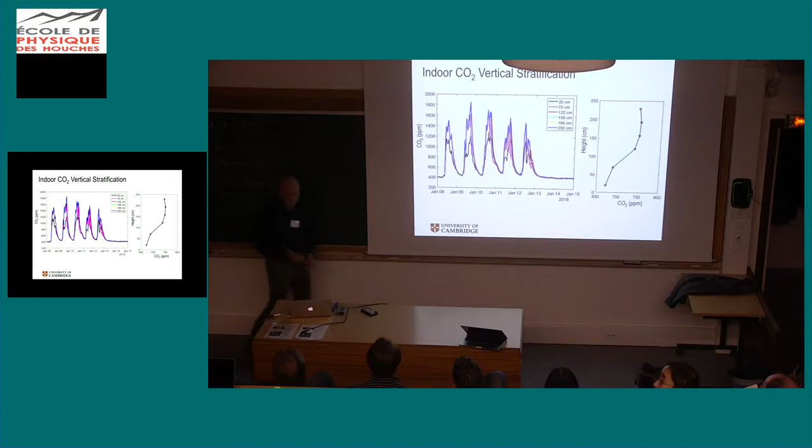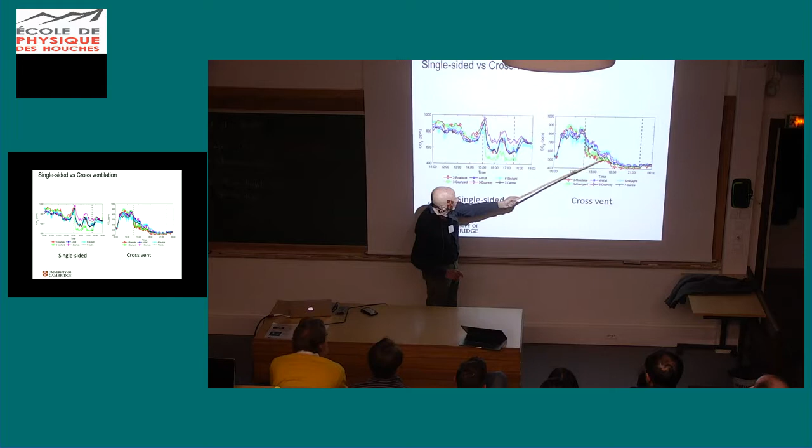You can compare single-sided ventilation, which has this large variability, to a case with cross-ventilation, which is much more efficient at flushing things out and makes things much more uniform. So you see variations in that form here.

Okay, I should stop in a minute. So I'm not going to talk too much, but we've done wind tunnel models and we compare them with the LES simulations, and they agree well, although Catherine implies that they don't agree with the real thing.

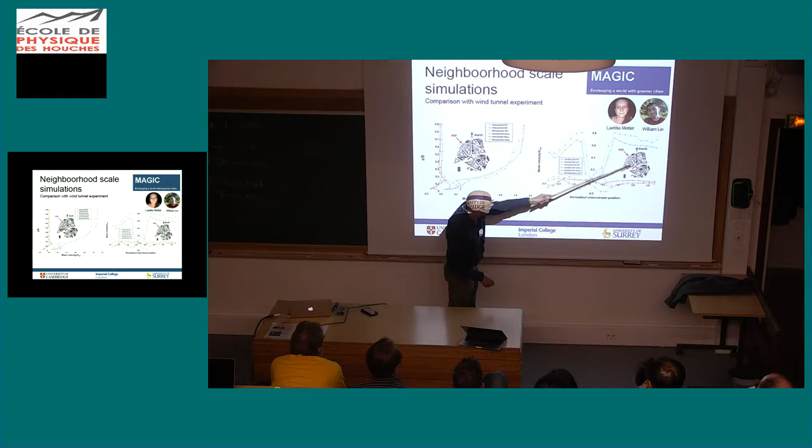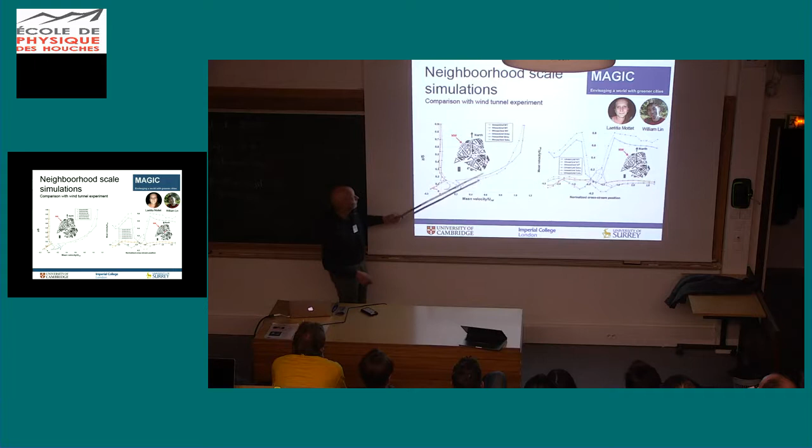But what we do see is a transverse across here is this huge reduction in streamwise velocity when the wind comes here, because there's a very tall building here. So we have a huge wake that lasts 3 or 4 building heights downwind. So the idea that this is some kind of boundary layer with roughness is completely wrong. And as I said, they're building new tall buildings around this space as we speak.

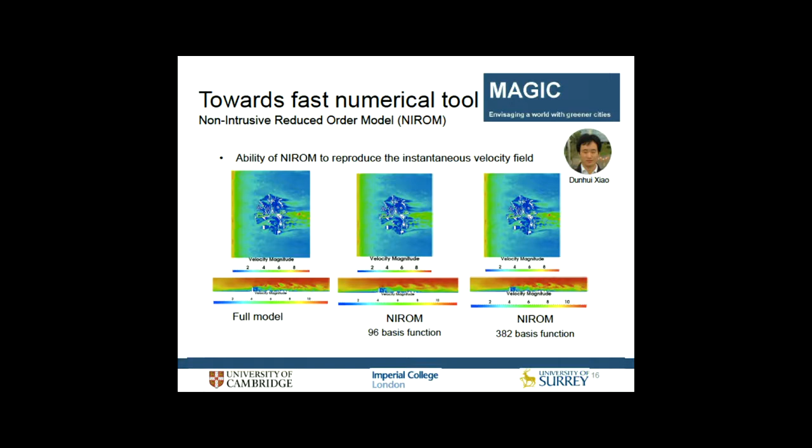Okay, I'm not going to go through all this. Just to say that the idea eventually is to have a decision support system, which includes the LES model, but surrounded by other things too, using reduced order modeling, in particular using data assimilation and uncertainty quantification. So many of the things that Catherine talked about, we're also very interested in and incorporating in this, and we are also using reduced order models to reduce the run times.

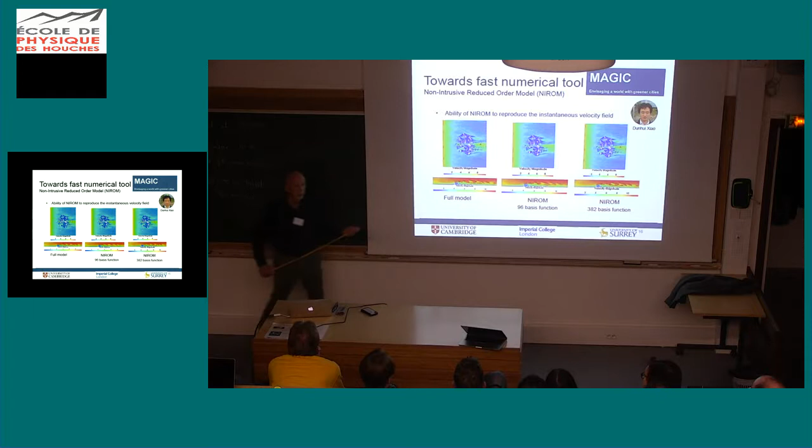So instead of using the full model, we take a representation based on a reduced number of basis functions and do that. And the speed up time here is enormous. To run this for an hour in real time takes 2 weeks, and to run this for an hour in real time with the reduced order model takes about 30 seconds.

And we're also trying to model things like vehicles and so on, and working closely with Transport for London and others. Okay, so the idea is that we'll end up with this suite of models with management tools and decision support tools, and based on the best science we can do for our air quality, and then using reduced order models to provide better, more rapid calculations and so on.

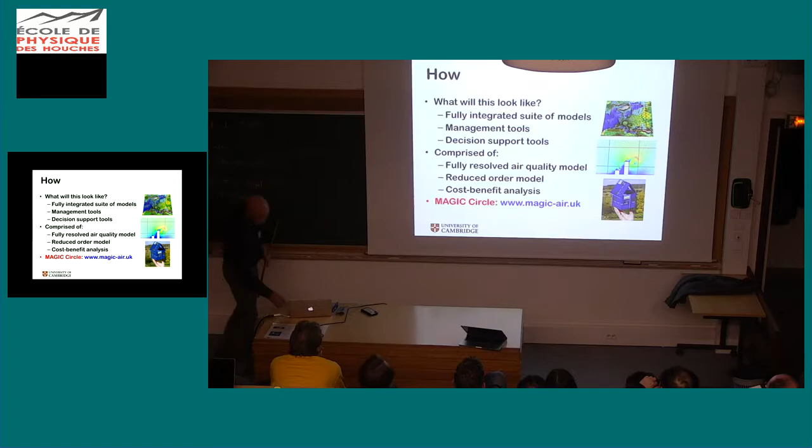And we have a magic circle, which consists of our inaugural partners, and we have about 30 industrial members, which is loosely defined, which also includes things like local councils and so forth, and 21 university members, and anyone can join. And if you want to join our circle, you get a magic circular once a quarter, and you're invited to our magic meetings once every 6 months.

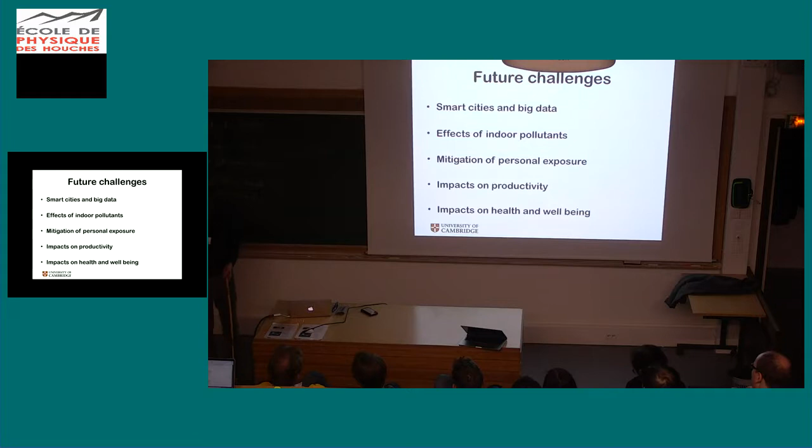Just to say what I think the future challenges are here, I think we're going to see increasing amounts of monitoring in cities. The kind of monitors we made cost about £300 each, so they're not expensive. They're not very accurate either, but they're not expensive. So there'll be a lot of monitoring, and lots of questions about how you deal with the data.

I haven't talked at all about indoor pollutants, and that's a really big and increasingly important area. We spend almost all of our time indoors, actually, 95% of our time indoors. So what happens indoors really matters.

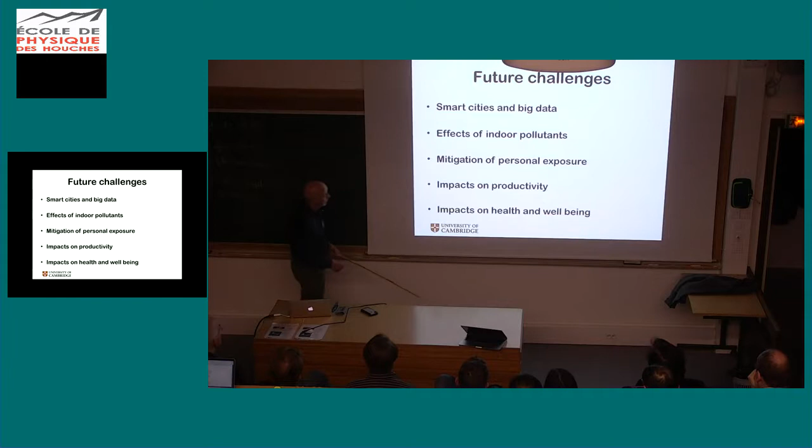And we're very interested in trying to use these kind of approaches to mitigate your own personal exposure. As I said, you've got to walk on the right side of the road. And then, of course, in the longer term, we'd like to understand more about impacts on productivity and impacts on health and well-being. I think it just leaves me to put up all the people who are involved in this project. It's a huge undertaking, and I thank you for your attention.